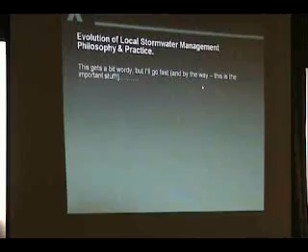I'm going to go through this evolution of the local stormwater management philosophy and practice very quickly, but this is the important stuff. This is where I think people should pay attention. This is sort of the practical application of the philosophies that have evolved over the last 30 or 40 years.

I don't expect this is any different than other jurisdictions. I think we're all in the same boat here.

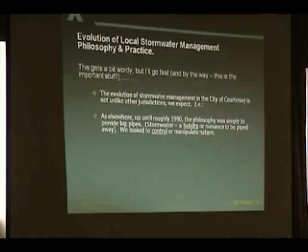Up until the 90s, the philosophy was, I think the big pipe liability concept was out there for quite a while - stormwater as a liability rather than an asset. I think that's really up until, in my mind, in my practice, maybe 15 years ago, that's the way we used to think.

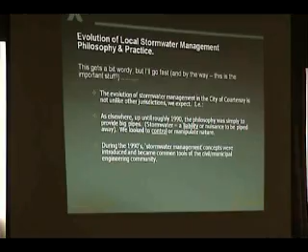Then in the 90s we started thinking about detention ponds, stormwater management concepts. This is a typical pond, built in conjunction with a large commercial development. This was right after it was constructed. It now looks dramatically different, but it's still an engineered pond, right? It doesn't fit the environment very well, doesn't fit the landscape very well. It's very rectilinear in shape. It's been planted, and if you drive by you can't see the water anymore. But it is representative of something that doesn't really fit nature that well.

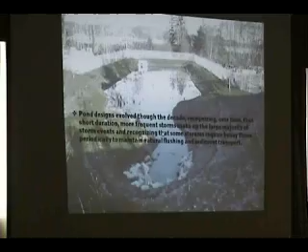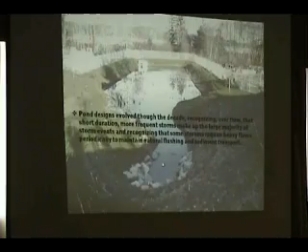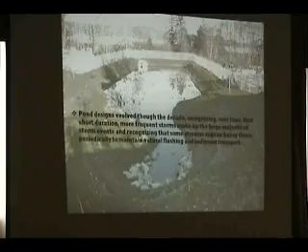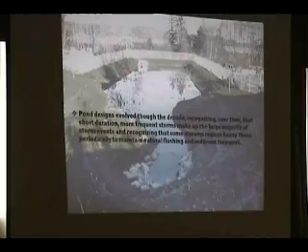These ponds evolved because we realized the continuum of storm events was what we needed to think about. As engineers, we're typically regimented in terms of a 2-year event, a 5-year event, or a 10 or 100-year event as being significant. But in reality we've got to think about the continuum, particularly the smaller events, because as you've read in the guidebook, the vast majority of total annual rainfall occurs in very low intensity, very frequent events - that's the rainfall we need to consider, not just the big monster storms that might blow up the storm sewer system down below.

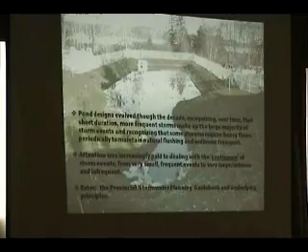So enter the Provincial Stormwater Planning Guidebook, circa 2003, I think. That's about right. Groundwater recharge is one of the fundamentals now, rather than just storm ponds.

Who can tell me what's the matter with this picture? It's in hardpan, that's right - I don't know who said that, but you're right on the mark.

I'll get into this a little later, but the idea is that if you're recharging the groundwater table, or trying to recharge the ground, you've got to be careful. You can do one of two things: you can do something that's not going to work because you're setting drain rock, porous material, and perforated pipes into impervious soils - so this will fill up and stay full, right?

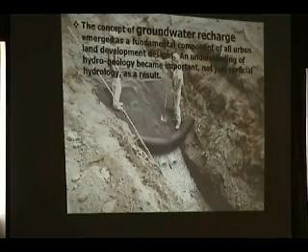Or conversely, and perhaps more problematically, you can put water into the ground where it shouldn't have gone, and it's going to pop out somewhere you don't expect and cause somebody a lot of grief. So thus, the concepts of hydrogeology, not just simple surface hydrology, have become far more common in the design of these kinds of facilities.

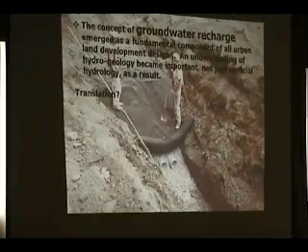That's what I'm getting at - this is no longer a simple science of just Q equals CIA over 360, right? A lot of the guys in the room know that formula, and it doesn't apply anymore. It's just not giving you the whole equation here.

So this is a simple oil-water separator. This is getting into water quality, which is another fundamental of the guidebook. We talked about quantity and quality, right? Quality being, of course, very important to the health of the streams into which this water is distributed.

You can tell me what's wrong with this one. Not hooked up - that's right. I don't know if this is actually true or not, but I don't see a bypass here.

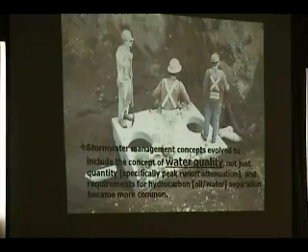A little techie thing, but these oil separators - this is a really small one, a small installation I put in - but if it doesn't have an overflow or a high flow bypass, it won't work, right? The oil will collect in there, and then the first heavy storm will just blow it out. It'll catch it for a little while, and then the big storm will just blow it through into the ocean anyway. So, the management concepts evolved into water quality compared to just quantity.

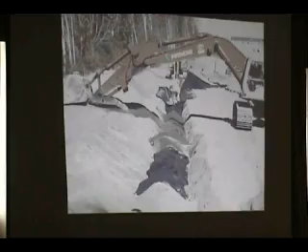This is an artificial aquifer behind a large commercial development. The idea is there's a perforated pipe up the middle, and the roof water from these 2-3 acre buildings, which are just monstrous, drains down into this pipe, recharging thousands and thousands of cubic meters of sand, which gradually works its way into the watershed slowly.

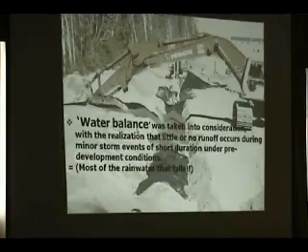So water balance and the water cycle became things engineers had to start thinking about, rather than just peak flows. And we begin to start listening to nature rather than trying to control it. I think that's really fundamental here.

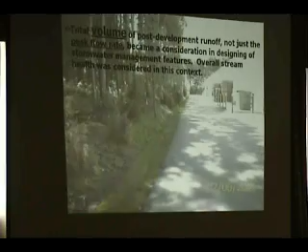So the total volume of water, this is another fundamental here. We're not talking just about chopping the peak off of peak flows, peak flow rate. We think about flow rate versus volume, right? That's the fundamental of the stormwater planning guidebook. That volume becomes something you've got to think about. But after you develop, no matter how hard you try, there's going to be more water leaving a given site than there was before, more total volume.

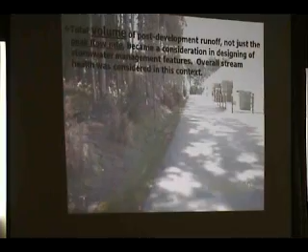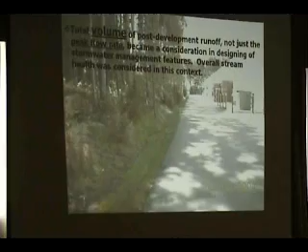And what the scientists have been telling us, because there's applied science which is applying this, is that the volume of water that leaves a given site actually does a fair bit of damage. The total volume is important to keep in mind. And that's the idea of recharging your groundwater table and trying to minimize that rapid total volume of runoff, even if it is a lower flow rate.

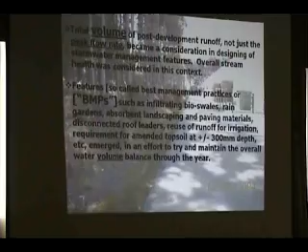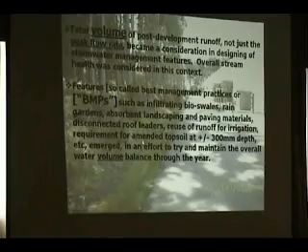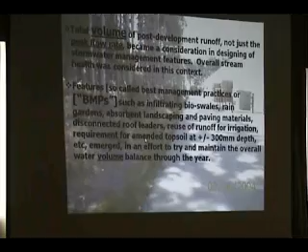So when we get into all these BMPs, and everybody's talking about BMPs, the one I think is most important here and the least utilized is this 300 millimeter topsoil idea. That's pretty simple to enforce. The areas that remain pervious, make sure they've got some pervious soil on them. Don't let the developer get away with 2 inches of black soil with a bit of turf on top. Force them into a sponge there, and that'll have an enormous impact on these low-intensity, very frequent events.

So catchment-based thinking, as compared to just what do I do with my site, how do I drain my site, how do I get on with life. How does this site impact the catchment overall?

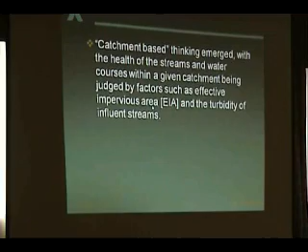And one of these buzzwords, effective impervious area, cropped up maybe a decade ago. Really important concept here is that if you can just break the curb line, for example, and allow this water that leaves the road to slow down a little bit, it will have a big impact on the watershed and the health of the stream.

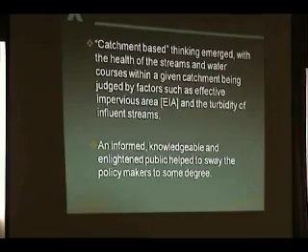So I think it's true to say that, as I started this discussion, we're reacting to some degree, but an informed, enlightened, and very knowledgeable public is having a large impact on the way we do things, and I'm happy for that. Because working for some perhaps less scrupulous land developers, for example, who are looking strictly at the bottom line dollar, I look to the regulators to force it on them, to put it bluntly, to ensure that the watershed is maintained and cared for. I think we're heading in that direction, and we're doing a good job.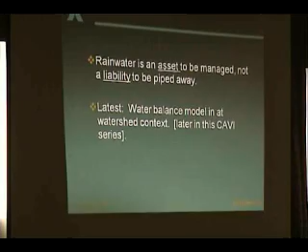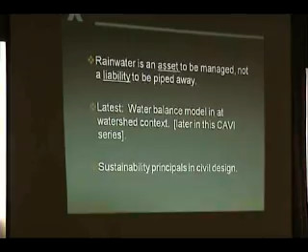So we're getting to the point where rainwater is now an asset to be managed, not a liability to be piped away. And I know in the next session, or perhaps the last one, Jim's going to be talking about the evolution of the water balance model, and now using it in a watershed context as compared to the site-specific utilization we've dealt with in the past. And lastly, sustainability principles in civil design, and that's a whole new realm we could talk about for several hours, so I'm going to just pass on that.